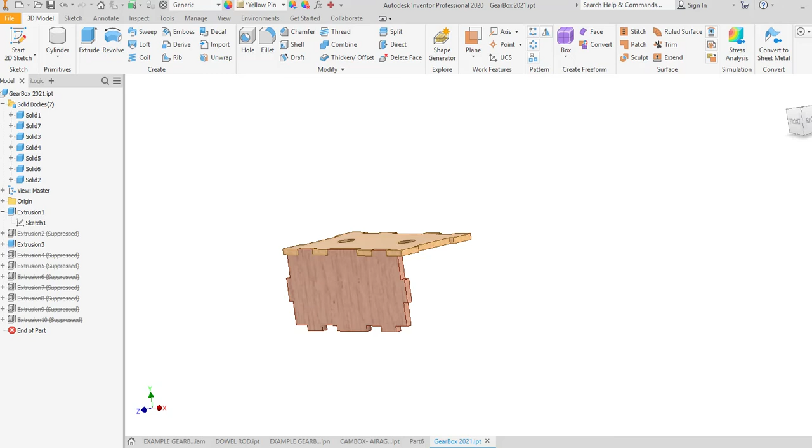In the previous video, I showed you how to make the front. In that video I showed making this little cutout, and in this video I cut them a different way. It doesn't matter, it doesn't change the way I'm going to show you the rest of the steps.

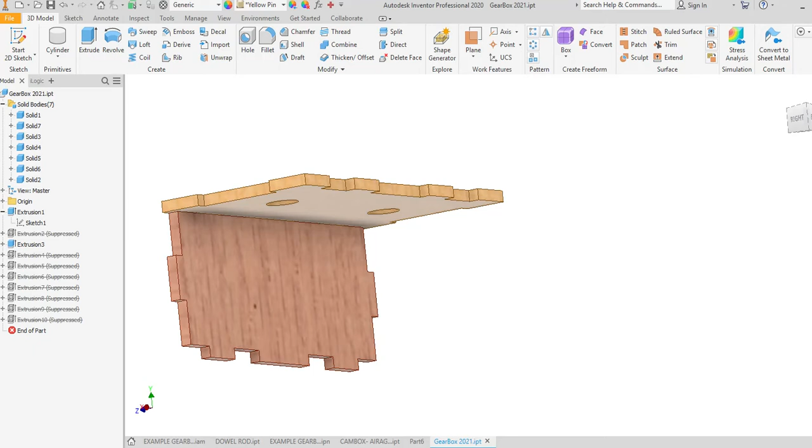Our next step is now we need to take this and put it on this side, and take this and put it on the bottom. So what I'm going to do is make this very easy.

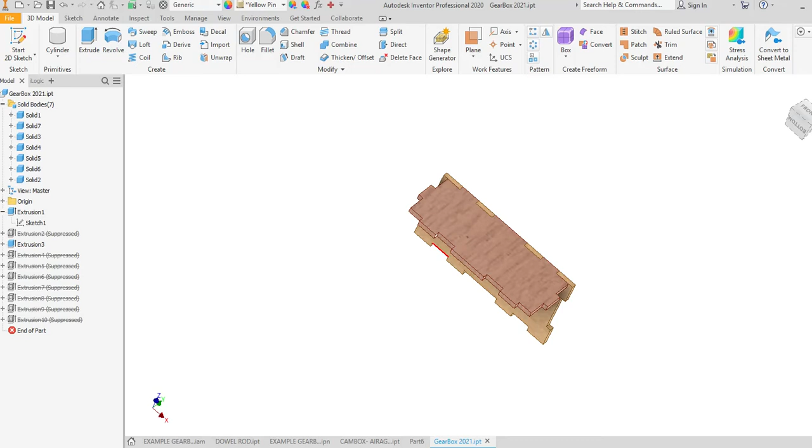The key part for this step is that this side is identical to this side. Otherwise you have to start over and do this other side the same way you did this side, and the same with the bottom. You want them to be basically perfectly mirrored from each other, so this needs to be exactly the same size as that side.

I'm going to show you both ways that you can do this. I'm going to start with a sketch on this side right here. This inside, you can do it on the inside or the outside, it doesn't matter.

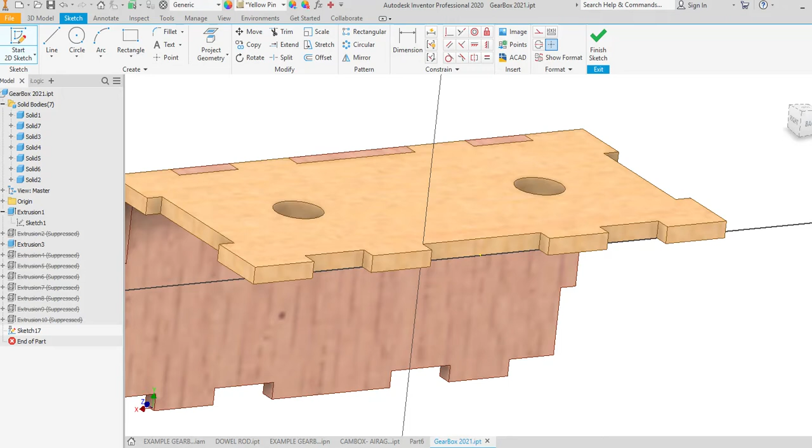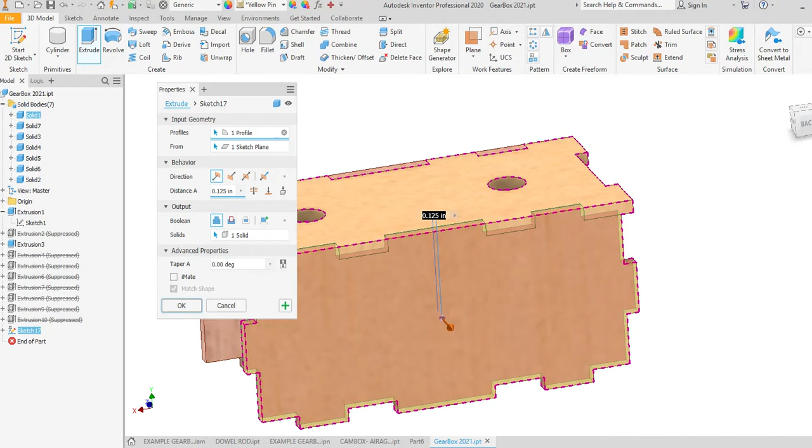I'm going to go up to Project Geometry, and I'm going to steal this entire side. You can see, as long as it lines up perfectly, and you'll learn that when you go to extrude it.

So I'm going to go to Finish, extrude it, and remember I need to make it a new solid. I'm going to click on New Solid, make sure it lines up correctly on all of these sides, and when I hit OK, I can come over here and you can see this says Solid 9.

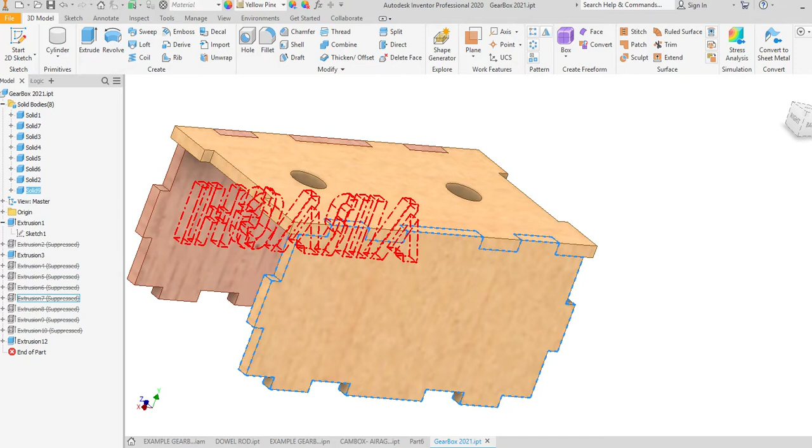I have these other solids. I suppressed these features so you couldn't see them. Currently you can see all the other pieces in here that I suppressed, but what I'm going to do is select solid number 9.

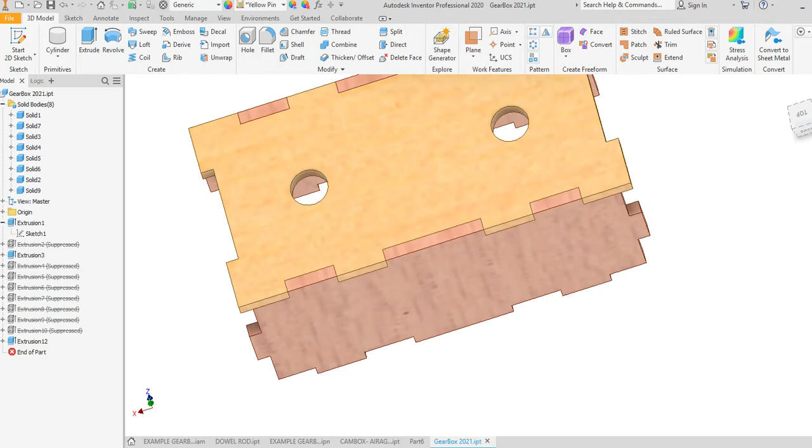I'm going to go down and make this another color—not that color, I don't want that color. White oak, there we go. So now you can see, when it lines up perfect like this, that's going to print out correctly when you go to cut it on the laser.

So this has to perfectly line up. If it doesn't, you have to start over and do the same process that you did for this side to make it match this side.

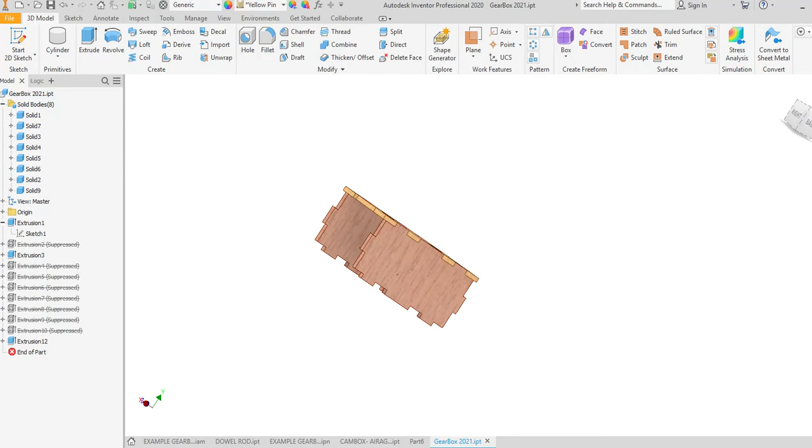Then the next thing I'm going to do is create a sketch on the bottom, and you can see how fast this goes. We're going to select the bottom, just like that, and click on Project Geometry again.

I'm going to choose the top, and we say Finish Sketch. Then I'm going to go to Extrude, and there it is.

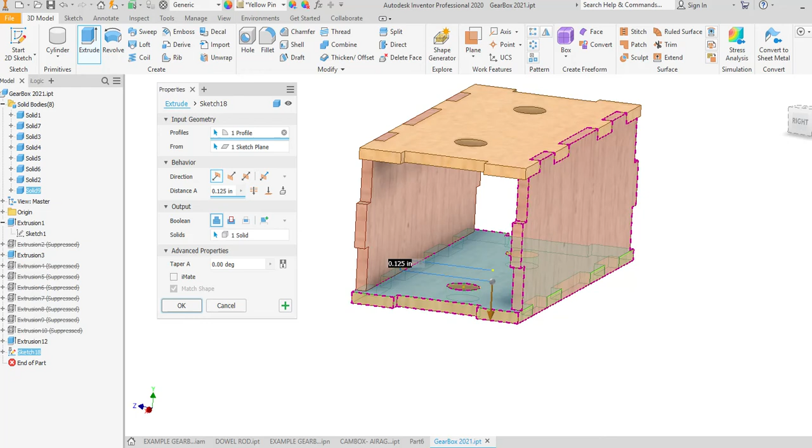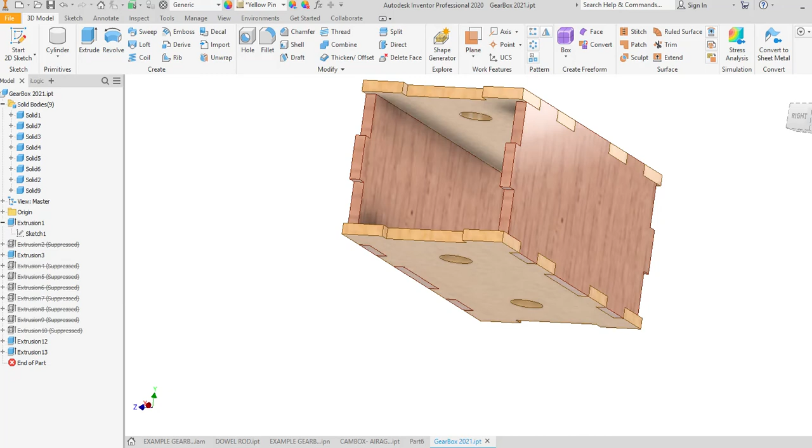Now, let's say I accidentally hit a part—you can see that it meshes with this side, but not this side, because this is a separate solid, but it meshes now with that side. All you have to do is come back and double click on that extrusion, and you can click on New Solid.

I didn't tell you this in the beginning, but I told you that the distance between these two circles needed to be 51 or 52 millimeters. I made this one 52. I'm going to make it 51, just so you can see. You can type 51 millimeters here, and it has to be lowercase.

It'll automatically convert it to inches. So if you wanted it to be 51, you could even do 51.5 if you wanted to kind of meet in the middle.

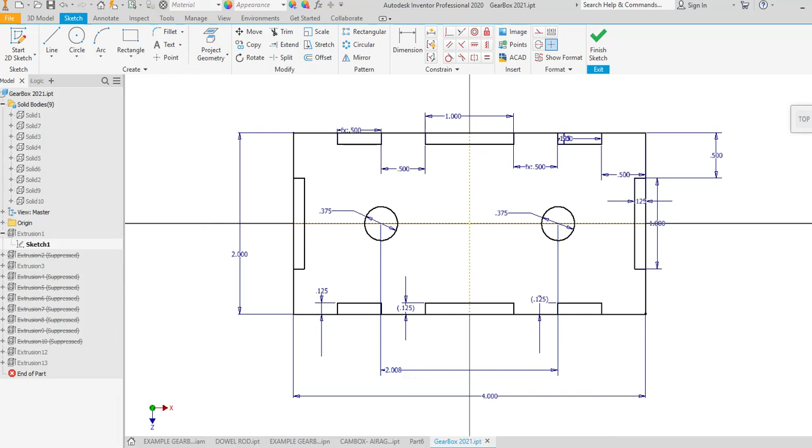In the end, you have to show that it actually works, so I'll leave this at 51. What's cool about this is when I went back to change it to 51, now that I see that moved here.

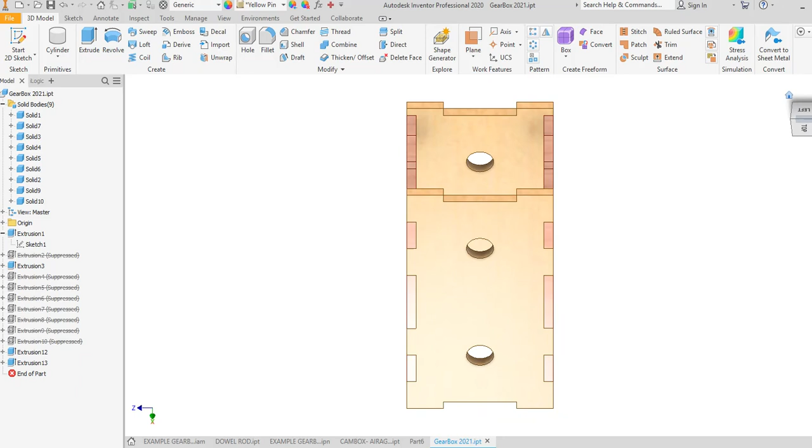It still lines up perfectly with the bottom, because I projected the geometry down so it matches and updates. So it is important that this lines up perfectly, otherwise it won't glue in correctly, and you'll have to make some modifications after you print it out.

In the next video I'll show you how to do the two sides, and then after that we'll do the text.